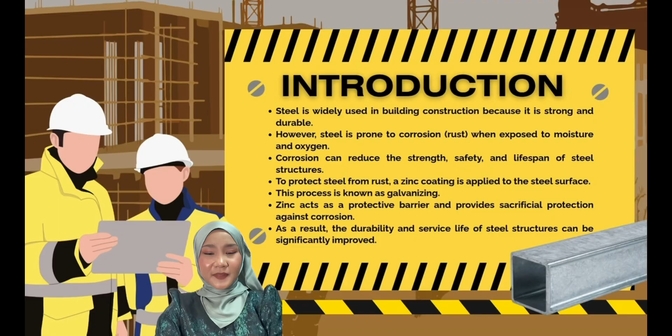2024282442. Now, I will explain the method of installation for zinc coating steel, commonly known as hot dip galvanizing. First, the steel undergoes surface preparation. It is cleaned through degreasing, pickling, and rinsing to remove oil, paint, dirt, and rust. This step is important because a clean surface allows the zinc coating to properly bond and provide effective corrosion protection.

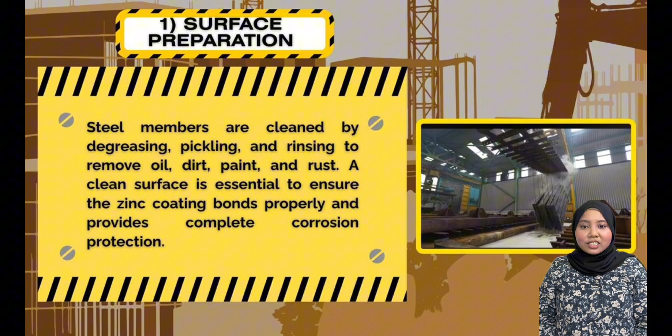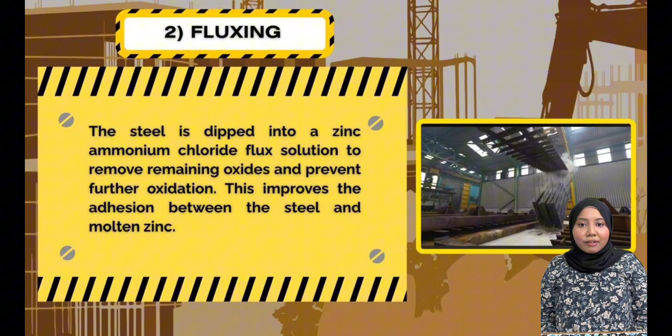Next is the fluxing process. The steel is dipped into a zinc ammonium chloride flux solution. This will remove any remaining oxides, prevent further oxidation, and improve the adhesion between the steel and the molten zinc. After that, the steel is dried to remove any moisture. Drying is necessary to prevent splashing when the steel enters the molten zinc bath and to ensure a smooth, even coating.

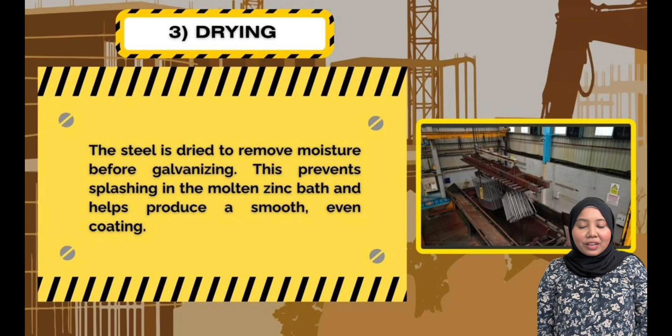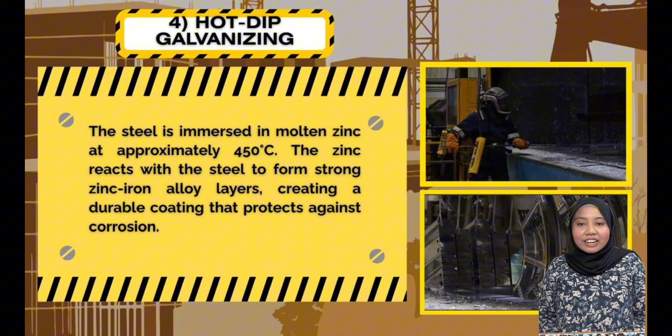The steel is then immersed in molten zinc at approximately 450 degrees Celsius. During this process, the zinc reacts with the steel surface to form a strong zinc-iron alloy layer. These layers create a durable protective coating that resists corrosion and extends the service life of the steel.

Finally, the galvanized steel is cooled and inspected. The coating is checked for thickness, uniformity, and surface quality to ensure it meets the required standard before the steel is transported and installed on site. In summary, the hot dip galvanizing process provides a strong, long-lasting zinc coating that effectively protects the steel structure from corrosion and harsh environmental conditions.

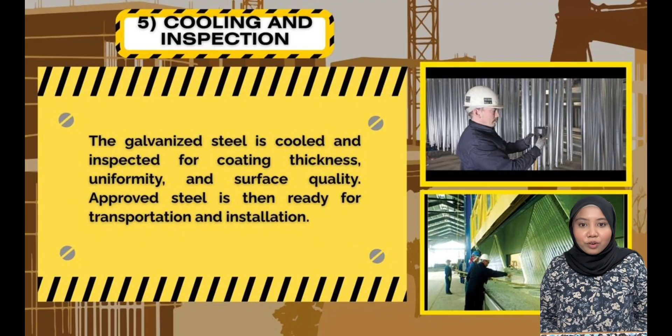Steel. So function one is barrier protection, where the zinc coating acts as a physical barrier that separates the steel surface from moisture, oxygen, chemicals, and other corrosive elements. During the hot dip galvanizing, molten zinc tends to form a strong metallurgical bond with steel, creating several protective alloy layers that adhere firmly to the surface. The continuous zinc coating prevents direct contact between steel and the environment, which reduces the risk of rust formation, and is particularly effective in humid, tropical, industrial, and coastal environments where corrosion occurs more rapidly.

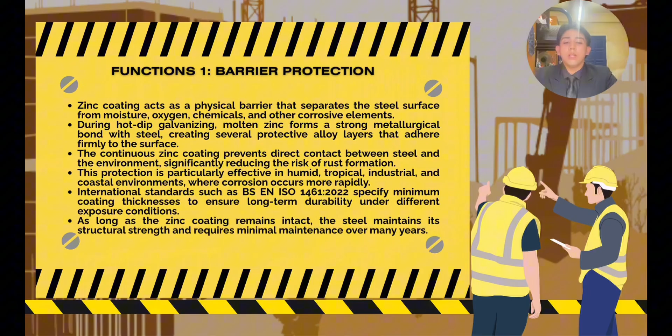It also follows standards to ensure long-term stability and durability under different exposure conditions. As long as the zinc coating remains intact, the steel maintains its structural strength and requires minimal maintenance over many years. For the second function, extending the service life, zinc provides electrochemical cathodic protection as it is more reactive than steel. When the coating is scratched or damaged, the surrounding zinc corrodes first, protecting the exposed steel from rusting.

This action allows galvanized steel to continue resisting corrosion even after minor damage during transportation, installation, or service. Unlike paint coatings, it provides a degree of protection for exposed steel edges and small damaged areas, forming a stable layer of zinc oxide and zinc carbonate, which slows further corrosion and extends the coating lifespan, making galvanized steel highly reliable for long-term structural applications.

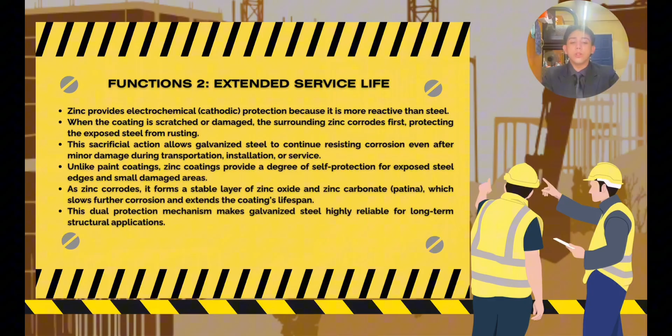The next function is environmental sustainability, where it significantly extends the service life of steel structures by protecting them from corrosion over long periods. In normal atmospheric conditions, it provides several decades of maintenance-free service, while even in harsh industrial or coastal environments it achieves long-lasting protection. The extended durability reduces the likelihood of structural deterioration, ensuring safety and reliability throughout the design life of the building and infrastructure.

The hard zinc-iron alloy layer barriers formed during galvanizing also enhance resistance to abrasion, impact, and other mechanical damage during transportation and construction. It is commonly used in bridges, transmission towers, industrial buildings, marine structures, and many more, as the long-term performance supports compliance with structural durability requirements in national and international construction standards.

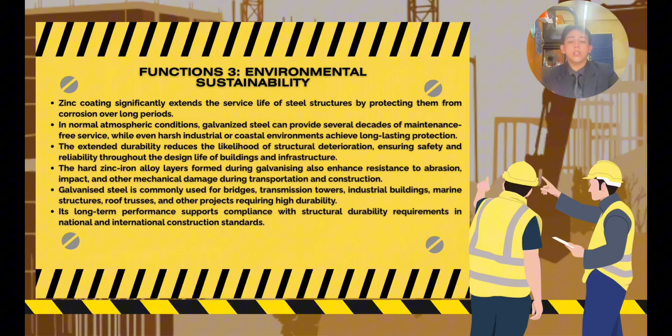This function is more general, but although the initial cost of galvanizing may be higher than painting, it offers overall lower lifecycle cost as it requires little or no maintenance for many years, eliminating frequent repainting required by conventional protective coatings. Reduced maintenance lowers labor costs, material costs, equipment expenses, and operation downtime throughout the structural service life, while also minimizing rework caused by scratches or damage during handling and installation.

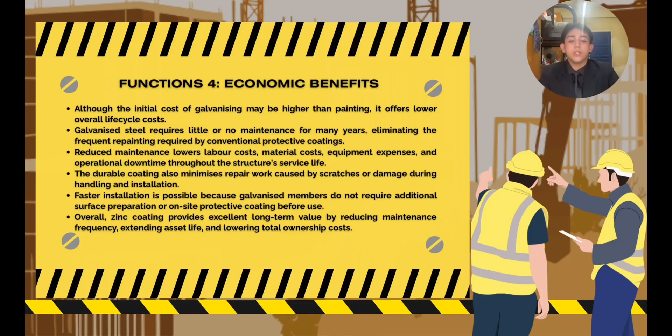It is possible to conduct faster installation as galvanized members do not require additional surface preparation or on-site protective coating before use, which provides long-term value by reducing maintenance frequency, extending asset life, and lowering total ownership costs.

For the last point, we already mentioned cathodic protection, but briefly: zinc coating contributes to sustainable construction by improving the durability and lifespan of steel structures. Zinc and steel are 100% recyclable, supporting circular economy principles and reducing construction waste, while the long service life of galvanized steel reduces the need for repeated maintenance and repainting, lowering material consumption and environmental impacts.

Unlike many paint systems, galvanizing minimizes the use of coatings containing volatile organic compounds during maintenance. Hot-dip galvanized steel may support green building initiatives by enhancing durability and energy resource efficiency, as it may comply with internationally recognized standards, ensuring quality, durability, and compliance with construction regulations.

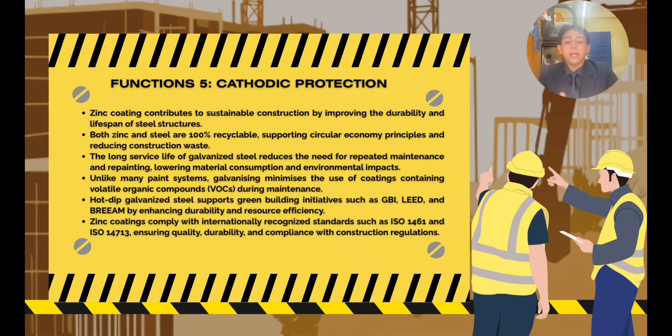The first advantage is excellent corrosion resistance. The zinc coating forms a protective layer that prevents moisture and oxygen from reaching the steel, reducing the risk of rust.

The second advantage is longer service life. Since the steel is protected from corrosion, it can last for many years without significant damage.

Another advantage is low maintenance cost. Galvanized steel requires less frequent repairs and repainting, which helps reduce maintenance expense over time.

Number four: zinc coating covers the entire steel surface, including the edges and corners. This ensures that every part of the steel is protected from corrosion.

Number five: zinc provides sacrificial protection, meaning it corrodes before the steel. Even if the coating is scratched, the zinc continues to protect the exposed steel.

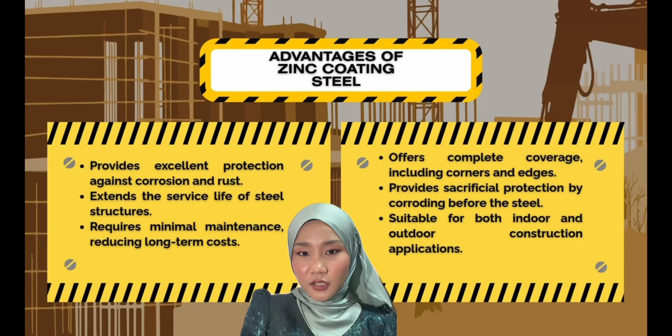Lastly, galvanized steel is suitable for outdoor and indoor applications because it can withstand different weather conditions and humid environments.

Now I will explain the disadvantages of zinc coating steel. The first disadvantage is the higher initial cost. Zinc-coated steel is more expensive than ordinary steel because it undergoes an additional galvanizing process. Although it can reduce maintenance costs in the long term, the initial investment is higher, especially for large construction projects.

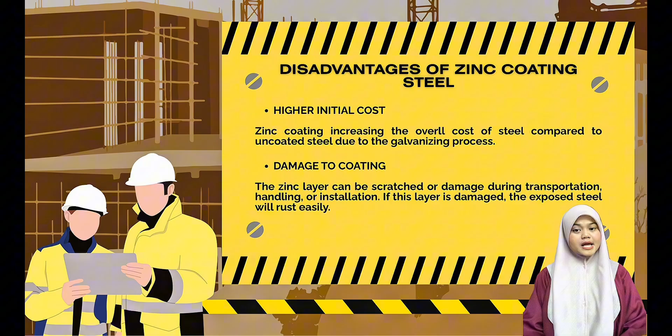The second disadvantage is damage to the coating. During transportation, handling, or installation, the zinc layer can be scratched or damaged. If these damaged areas are not repaired properly, the exposed steel may begin to rust and lose its corrosion protection.

The next disadvantage is that it is not suitable for highly corrosive environments. In coastal areas, chemical plants, or places with acidic conditions, the zinc coating wears away more quickly, reducing its protective performance and shortening the service life of the steel.

Another disadvantage is the difficult welding process. Welding galvanized steel produces toxic zinc fumes, which can be harmful to workers if inhaled. Therefore, proper ventilation, safety equipment, and post-weld coating repair are required, making the process more complicated.

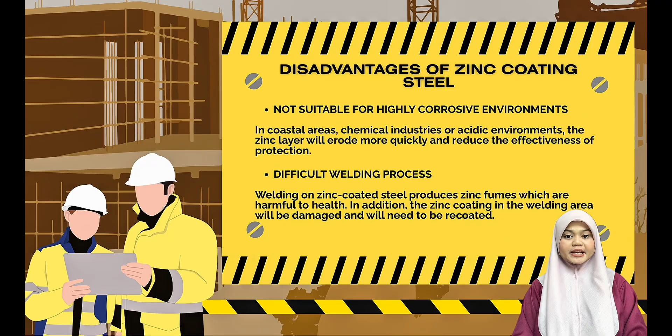The fifth disadvantage is limited resistance to high temperature. Zinc coating starts to lose its protective properties when exposed to temperatures above approximately 200 degrees Celsius, making it unsuitable for structures exposed to excessive heat or fire.

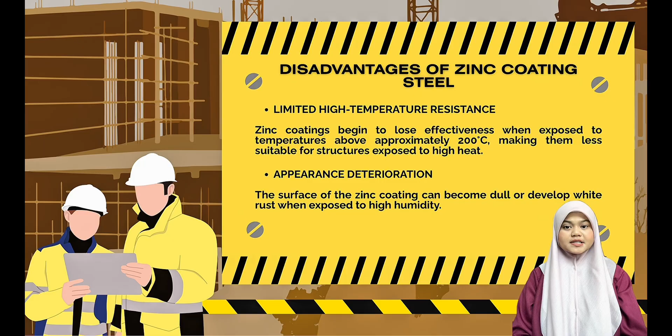The last disadvantage is appearance deterioration. Over time, the zinc surface may become dull or develop white rust when exposed to moisture. Although this usually does not affect the structural strength immediately, it reduces the aesthetic appearance of the steel.

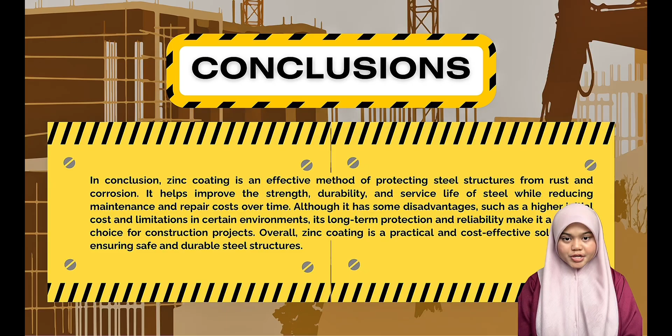In conclusion, zinc coating is an effective method of protecting steel structures from rust and corrosion. It helps improve the strength, durability, and service life of steel while reducing maintenance and repair costs over time. Although it has some disadvantages, such as higher initial cost and limitations in certain environments, its long-term protection and reliability make it a popular choice for construction projects. Overall, zinc coating is a practical and cost-effective solution for ensuring safe and durable steel structures.